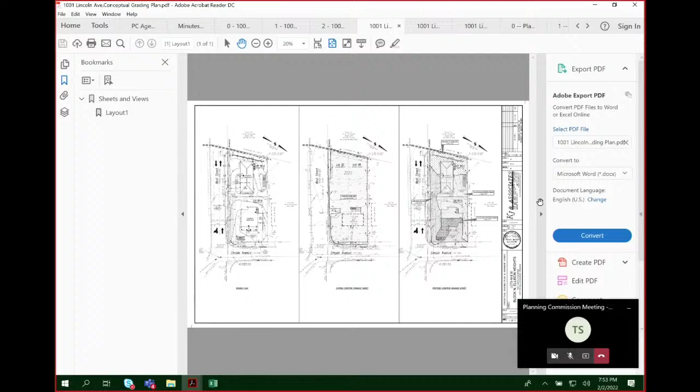Sure. And I think the plan at the moment is for street parking along West Street to be eliminated in favor of having a sidewalk and tree planting area. Is that correct? Yes. So I gather there's just not enough room in the right of way there to allow all of those needs to be met.

Yes. Like I said, sometimes when some of these applications come through, staff likes to seize the opportunity to connect some of these neighborhoods with sidewalks. This was a street that was outlined in the 2005 comp plan, the major thoroughfare plan, and so the city staff has the right to ask for that sidewalk there.

Right. Although it is a little bit early with all of the other materials to be reviewed and so forth, my preliminary reaction is that is a good move and that having a sidewalk there is very important. So I'll just provide that feedback at the moment. And I think that's all that I've got for right now. I may have some others later.

Thank you, Mr. Stevens. All right, Ms. Teets, go right ahead. Yes, well, Mr. Stevens asked one of my questions because I did think it was odd that it looked like one of the lots was under the 7,500, because certainly there's enough square footage for two legal R1B lots there. So I'm sure that was just something they can fix.

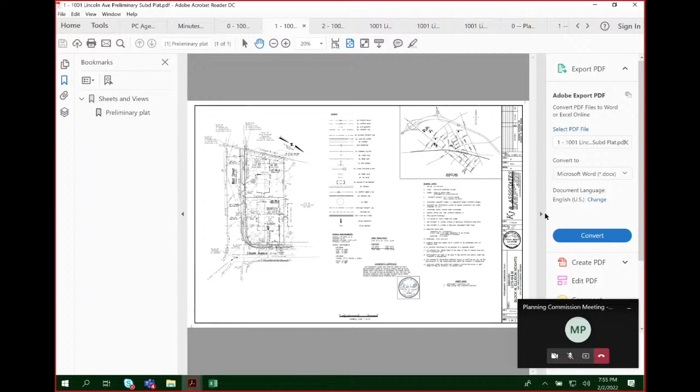So my understanding is because these are residential lots, they have to submit the grading plan. And I'm hearing much from a lot of the neighbors in that area about they're very concerned about stormwater and runoff. Mr. Stevens spoke to that. But isn't there, for the subdivision itself, I'm not sure that we can actually vote against it based on stormwater.

That's not one of the provisions for a legal site plan, but all of the stormwater issues have to be dealt with at the grading plan, correct? And basically for a residential lot, I think the only thing we can do is make sure that there's not more runoff from the lot than there is currently. Is there more than that we can do now?

Mr. Holland, can you respond to that? I know I talked to you and Mr. Stoddard about that offline, but can you? I mean, I'd love to be able to do more, but...

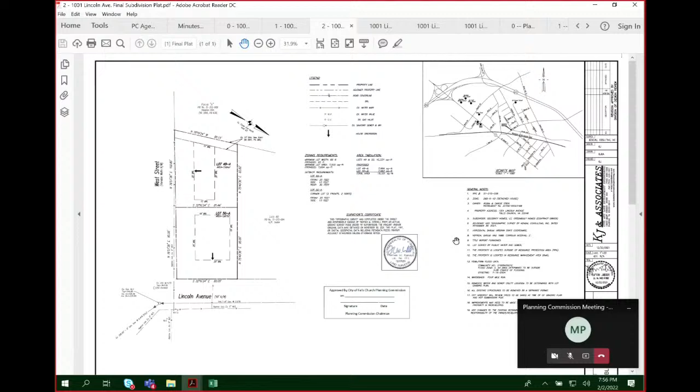I think you're correct. Like I said, the standard, I believe, is that we are trying not to exacerbate the existing conditions. We take it, we try to take it a step further when possible, and fix things. But I think the standard is that we cannot exacerbate what's already happening. So that being said, Planning Commission probably cannot deny a subdivision because it doesn't make things better. But at this point, staff does not feel comfortable recommending the subdivision because of the stormwater conditions at the site. And we won't know any more until we're able to work through this grading plan and really analyze it.

Well, I'm actually glad to hear that, because in the past, we've been told that we can't deal with the stormwater, and I've been to more than one grading plan meeting where the staff has asked for things, and then the applicant has said, no, I'm not going to do it. There was not very much the staff could do because we just didn't have the legal right.

So anything staff can do to deal with that stormwater, I much appreciate. Sure, and credit also to the applicant. We don't typically ask for a grading plan at this juncture with a subdivision, but because of the comments, and meeting a couple of times with the applicant team, they were able to turn this around very quickly. I would imagine they'd be able to turn around something else between now and the targeted public hearing, to make staff feel better about a recommendation to Planning Commission. They've done a great job responding to comments quickly. Yeah, that's great to hear.

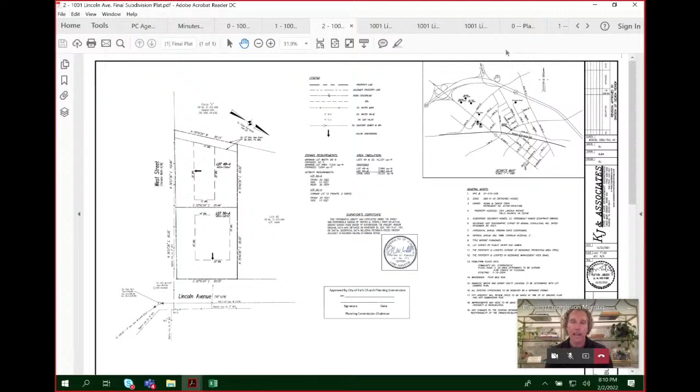And wouldn't force current stormwater inundation onto adjacent properties. Well, we submitted a plan last night showing a preliminary grading idea where we have a home sited on the lower lot that's well above any flood level that could occur. The building code addresses how to build a home that won't flood with proper foundation drainage, sump pump, etc. I'm confident the structure we would build there would not flood.

Have you seen the photos? I live nearby, so I've lived it for 10 years. Have you seen some of the photos? I don't know if you've probably never been there - I have.

I'm sorry, I have seen photos as of early this afternoon for the first time, and I'm actually surprised by the condition at the site right now. I think you said it yourself, and city staff has also said it, that the pipe currently serving the neighborhood is undersized, and I think the city infrastructure here is adversely affecting this lot and the neighbors on Steeples, negatively impacting the property owners, the Steins, and their ability to subdivide, and therefore the value of the lot.

Perhaps, but I wouldn't say the responsibility to fix that falls solely on you or on them. I do think it presents some challenges here, that ultimately that's the city's infrastructure and there's some deficiencies there that are longstanding. But again, in order for us to say we're not going to exacerbate that, we can't put our heads in the sand and pretend that's not there and say let's just build a house there, raise it up, and shift that water into that home.

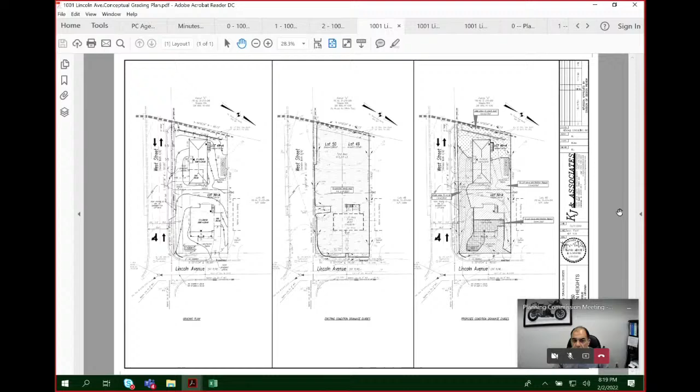I don't know if the members of the Planning Commission have been sent the concept grading plan. There are two other pieces on that sheet. There are three views: one is the grading plan showing what we're proposing to do in regards with grading the two lots, and then there is an existing condition drainage divide and a proposed condition drainage divide.

Discussing the grading plan itself, that's the furthest to the left on the sheet. We're providing, as Mr. Krasner mentioned, an infiltration trench facility on each lot. Per code, we are required to ensure that the runoff from the facilities is less than or equal to the existing condition for each lot. If you notice, the infiltration trench in the lower lot, 49A, is larger than the one in the front, because the rear lot, after it's subdivided, would be considered open undeveloped land in regards with impervious coverage. That's why the trench is larger.

Now, having said that, admittedly we do not have any values for the infiltration trench perc rates yet, but regardless, we are required to meet both the city and the state code, and that will be met.

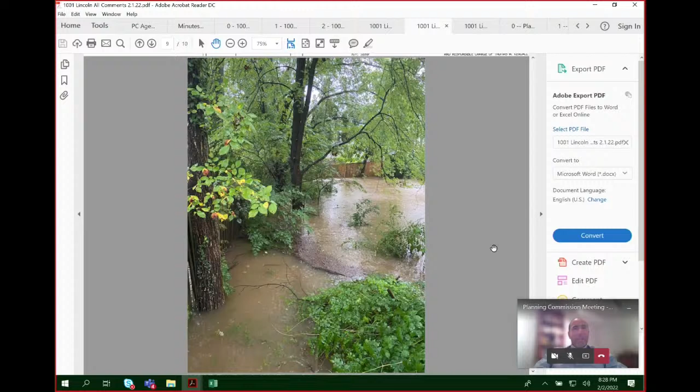The water pools up very fast. Within an hour or two it eventually works its way down. That photo is on the lot, you can see it. And if you look at the other photo, that's taken from the backyard of the lot on Steeples, looking from the back of the home onto lot 49, proposed lot 49A. You can see the brown water, how expansive it is, how it spreads out, because it hits a dam essentially, which is the grade at West Street. The pipe can't funnel it fast enough, so it pools up and turns into that situation.

So the engineering challenge is understanding that, and understanding that perhaps the city has some role in ameliorating that. I think the responsibility any developer of this lot would have is you're going to need to deal with building a house in an area that's currently a lake several times a year. How do you deal with that? And what does that do to the neighboring properties when we have another similar storm, which happens several times a year, during heavy rainfall typically between May and October. So I think that's the challenge - these are the facts on the ground.

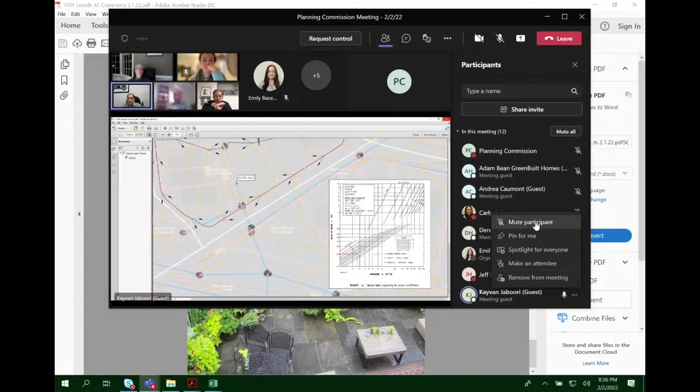This chart is a design of a grate inlet chart. When I put that 0.264 in this chart and come across with the size of the inlet and all of that, we should not get more than 2/10 of a foot depth of water. Then if I can figure out how to bring this other...

Mr. Jaboori, one question, I don't mean to interrupt, but just one question while you're doing that. Yes. I mean, your map, I don't know if it's taken into account the fact that the pipe, during heavy rains, beyond the 10-year storm but not much beyond it, the entire draining area to the north, along the back between the Steeples property and the backs of the homes on Lincoln and all the way up, is draining overland into that yard. It's all finding its way down there because the pipe itself gets overwhelmed, and water is draining from a much larger area and finding its way to that corner.

So, my argument, Mr. Krasner, is that I agree with you. But lot 48, which is the immediate lot upstream from the current condition, lot 49, has a yard inlet in it. That inlet, that structure is not functioning. Everything, in my professional opinion, is not working right because of the pipe system being inadequate and unmaintained. I kid you not, if the city takes a few hours and finds a way to clean that whole run, these neighbors will not see half as much flooding.

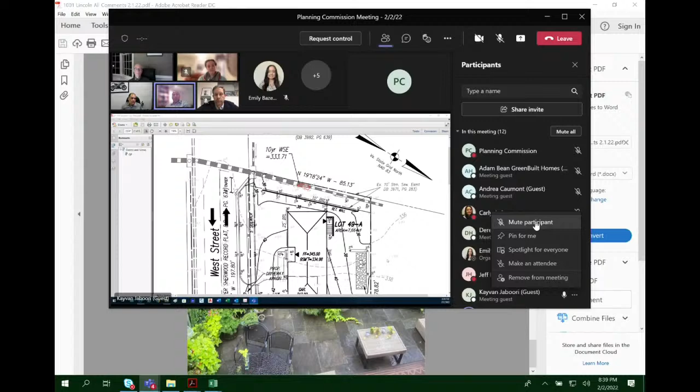I think that, and I'd be interested to see if you can somehow model that or show that. I see what you're showing here as far as the volumes, based on how much the pipe may be constricted now versus if it's cleaned out, and what that may do, how many additional CFS or gallons can now flow that are being stocked up now. That would be interesting to know if you're able to provide it.

Before I continue, do you now see the screen that has a red bubble on it? Yes. Okay, based on the area that I showed the calculations for, and based on the current topography of that lot, that much water should pond only that red bubble for the 10-year storm. I just wanted to share that with you.

In regards to modeling this, modeling it is going to be a challenge and a half, because that pipe is not truly a 36-inch pipe. It's been squished on both ends. Plus, in order to model that to see what happens, it needs to be evaluated all the way. The way that's going to work...

We need to evaluate it as what is called a hydraulic grade line. A hydraulic grade line analysis cannot start halfway upstream at some arbitrary point. You've got to go all the way to the outfall, get a known water surface elevation, and work up based on the drainage area to each piece of the pipe and work it up. It can be modeled, yes.

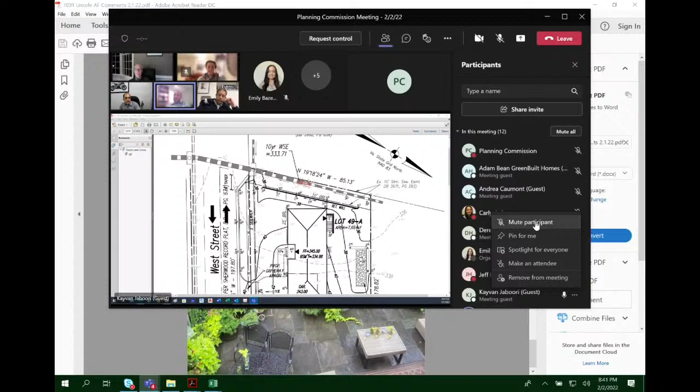Well, one thing I know is that the city, a few years ago, there have been fits and starts on stormwater in the city in general, but in this neighborhood, I know a few years back the city had some outside group do some surveying work in this area. I live a little bit north of here, and I know there was a time where folks the city hired came out and pulled up some of the manhole covers, had some surveying equipment, were doing some analysis, and I don't know where that went, or what the data and final product of that was. But we should ask the city.

I think we're asking Mr. Holland, I think we're asking the city if there's any additional information the city has on the state of the infrastructure there, because I agree that might be helpful. I don't expect this applicant to take on a citywide project, but I think the city may have some additional information. The underground pipe continues to the north like another couple hundred feet, then it daylights, and then to the south it keeps on going much further.

So yeah, I hear you. The city may have some additional information. We should find out what we do have. It was probably like 5 years ago, so not ancient, like 5 years ago that they did some work there.

And I don't know what that was about and what the end product was, but they had some folks, maybe they were just looking for the current condition of it, doing a condition analysis, but they were looking at it on the north side. Pardon me for interrupting, but it matters not to us, unless you want to go all the way up to the top of the run. It matters not to us what happens north of us. We've got to figure out what's going on south of us so we can work it upstream.

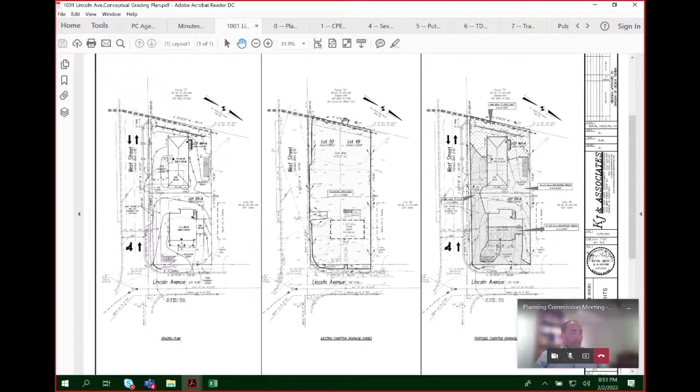Okay, well moving right along. The next item is item 8, our information item. And 8A is Planning Commissioner reports, if anyone has anything to share. Anyone have anything they'd like to share? Any interesting meetings folks have attended in the last couple of weeks?

Mr. Stevens, go ahead. Yeah, I attended the EDA meeting last evening, and they covered a number of topics of interest to us. The first had to do with the 10-acre commercial development up at West Falls and the EDA's role in that, since the ground lease for most of the project is 99 years. It's going to exceed what state code allows the city to do, so the default is to have the EDA kind of own that lease, so to speak.

Mr. Shields gave an early review of the steps leading up to that. There'll be a memorandum of understanding between the EDA and the city that would outline, presumably pretty carefully, the EDA's roles so that they don't have to be involved in the money aspect, as far as accepting monthly rent payments and that sort of thing. It'll just go directly to the city.

Atlantic Realty gave another presentation on the One City Center. A couple of issues were raised by various members, including the architecture of the existing building, which still kind of rubs some people the wrong way. Some people recommended that the area designated as a park be a dog park.

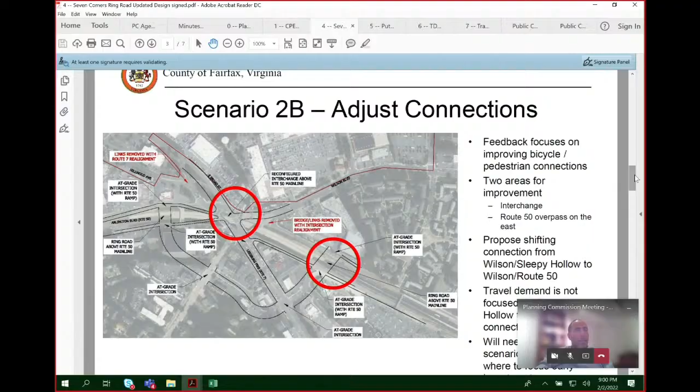I was talking to Paul, and he figured back of the envelope it creates almost like a 10-acre chunk that is pretty significant that could really help. As opposed to the Ring Road before becoming like a liability for us, it could in this case become a real asset that could help with additional development there by providing better access, both car and bike. So it was a big plus in that sense.

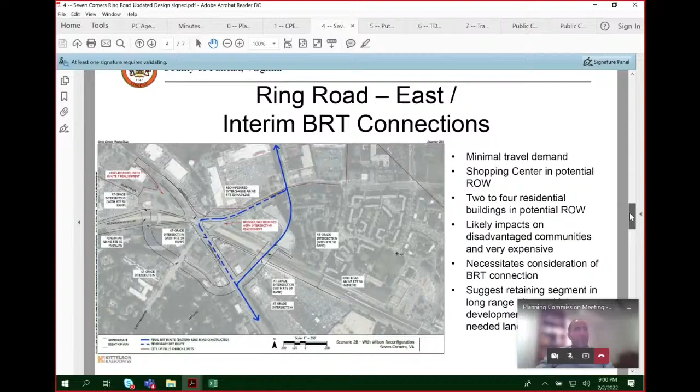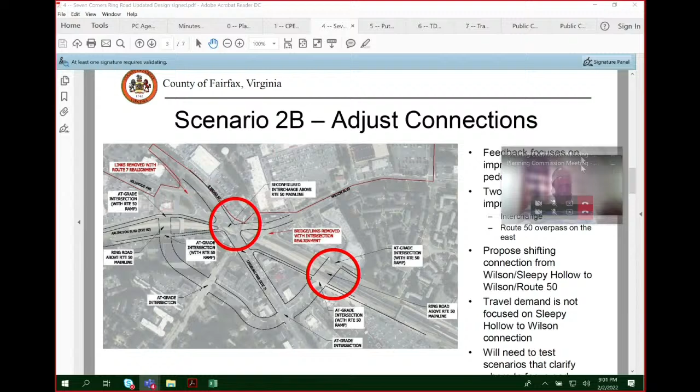You can see in some of those graphics the difference with the 2B scenario. I think, certainly from the city's point of view, it's infinitely better than some of the other options that had it going all the way around, which would not have been a great thing for us. This actually could prove to be very helpful as far as encouraging additional development on some of those properties that are sort of underutilized today.

So yeah, I echo that. It's a good thing. I know Paul was very interested in advancing that option with the city, with the county DOT. So I told him I can't officially lobby for that, but I know some of the folks working on that, and I can try to hit them up in the lunchroom, if we still had a lunchroom, to push that option, because I think it's the better option by far. So anyhow, just echo that.

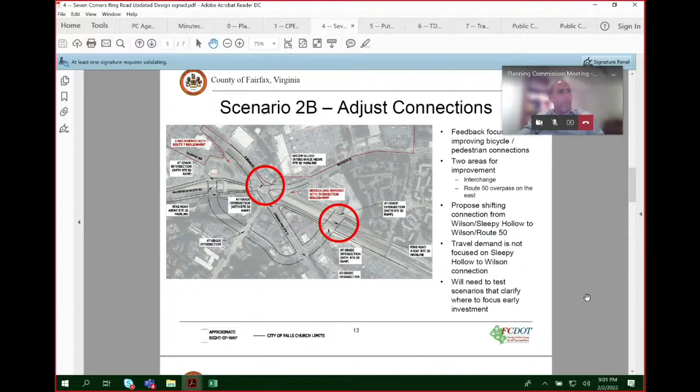All right, there are a few other things, Miss Aubrey. I think there's a couple of things. Is that it? Is there a couple other things? Nope, that's all I had. I think the last thing is to go back to the minutes to get those adopted.

Oh yeah, the minutes. Look, Emily's already got them up there. We were short on the minutes. Now that Mr. Hira is with us, because Ms. Coman had to abstain, she wasn't there. So now that Mr. Hira is here, we can get back to the very important business of adopting our minutes. So we'll go back to item 6A, which we tabled. I'd forgotten about that, thanks for reminding me. Got my power on this here. You don't want to.

So would anyone be so kind as to make a motion to adopt the January 19th minutes? I will move again to adopt the minutes. Thank you, Mr. Stevens. And I believe it was Ms. Teets, did you second that before? Yes, I did. So would you re-second it? Yes, I second. Okay, good.

All right, discussion on that? If not, then we will get a roll call. Chair Krasner, yes. Mr. Stevens, yes. Ms. Teets, yes. Ms. Comont, abstain. And Mr. Hira, yes. All right, the all-important fourth vote to approve the minutes.

So those minutes, we don't want to get behind. Ms. Bazemore does such a good job of keeping us up to date on minutes. I've worked with boards that are years behind on minutes, and so we don't want that to happen to us. Now thank goodness that Mr. Hira showed up, otherwise we would have potentially been meeting behind.

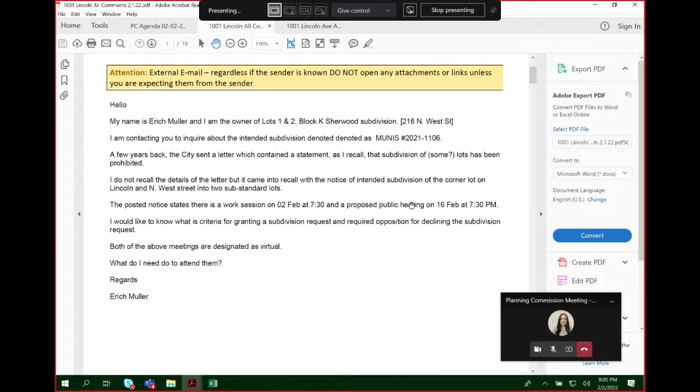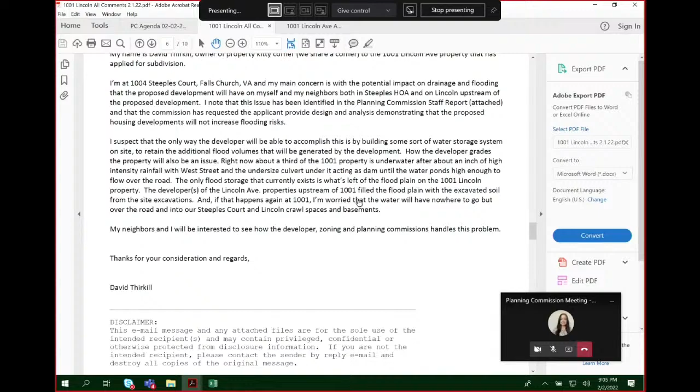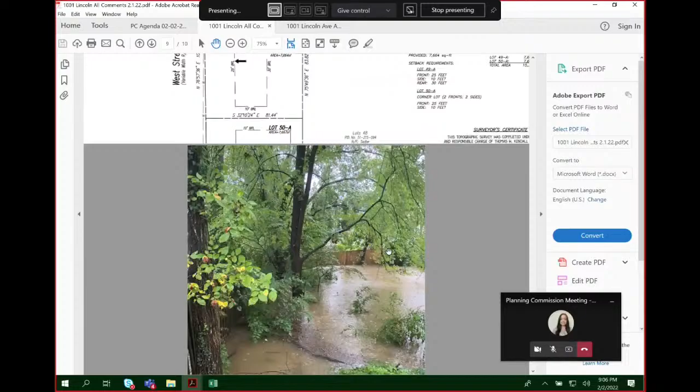So we have Erich Muller, we're just gonna go down the list. Tom Moffett. Let's see, David Thirkill. All right, I think this is David again. And then going down, we got the next one, president of the Steeples HOA. I'm not sure if that, maybe that is... is it Susan Sasner? No. Not seeing one from the HOA, but I probably just missed it. Maybe it's on this one. Okay, no, I'm not seeing it. I think it was earlier.

Okay, no, I'm not seeing that one. I may need to go back and search. I know we got it. I read everything that we got. I read it. So if it's in there, I read it.

But maybe for the next meeting, and I know I just put you on the spot, Ms. Bazemore, for any additional written comment that comes in, if we could, we'll take some time during the hearing, maybe after any in-person or virtual speakers speak, to identify and summarize the concerns. I know they do that at the city council, and I think that's actually a good thing. I know Mr. Gresko recommended that, and I actually like that suggestion, especially during our virtual format, so that folks can know that we got those letters and that we put them on the record at the meeting. Especially when there wasn't a day where we were inundated with like 100 letters, we might have to talk about a different format, but when it's only a handful, I think we can give people the courtesy of just identifying the letters we received. So if you could do that for next time, that would be good, I would appreciate that.